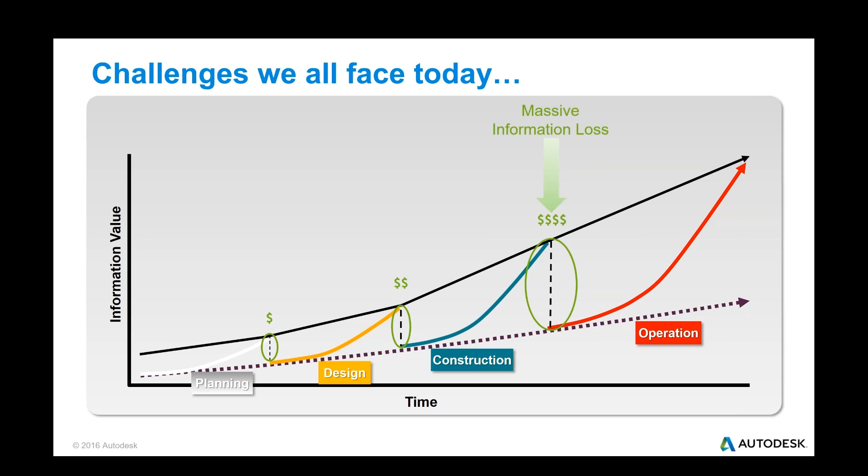So while there are benefits to each of these new softwares, there's also a lot of disruption that goes into it. And as you can see by this slide, the farther into that construction piece that we get, the more money it costs if we don't know what we're doing, where we're going, and how we're communicating.

Well, first off, we want to make you aware of the fact that Autodesk was the first technology provider in construction committed to the cloud. In 2012, Autodesk CEO Carl Bass announced their intent to fully invest in the cloud. That investment translated into a completely retooled development organization by adding hundreds of skilled development staff and focusing on building and architecture.

And we've seen this over here at CAD 1. We really got started in AutoCAD and then moved into Revit, but now we're seeing Autodesk invest heavily in their development in the construction space, providing good solutions that take design from architects and bring them to the cloud to communicate better through the construction cycle.

Let's see. Keep going.

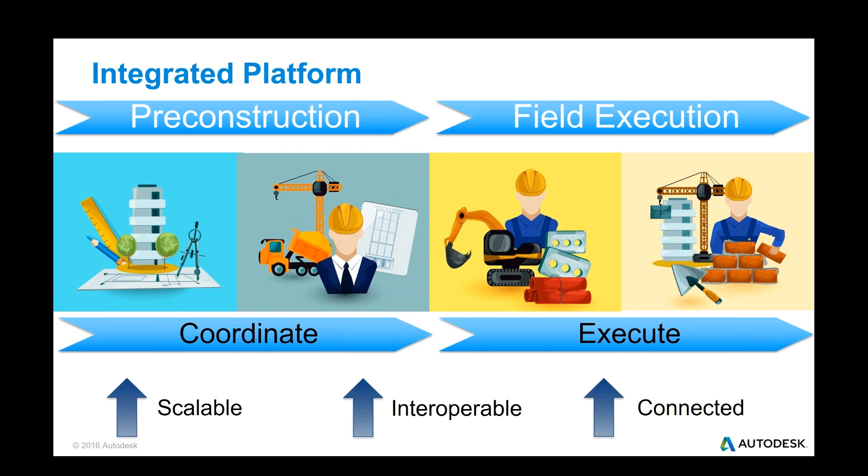So as we move through the planning and into the field, Autodesk solves your change management issues with a suite of offerings purpose-built for the execution phase of all the projects.

So all of this is grounded in Docs, which is the foundation for the entire platform. But it doesn't stop there. What's unique about the offering with Docs is that you can scale your investment as the need expands.

So we see a lot of customers in construction today struggling to use their view, markups, issues, point solutions to really manage the change on their job sites. But Docs is now a foundation for the change management that they need.

I sound so official. Yeah, you do. Yeah, I'll tell you. So let me tell you what the difference is in Docs in the industry today.

So we believe that you need version control with any view, markup and issue product that can be brought out to the field to automate the drawing and markup distribution. We also believe you need to manage the versioning and change process for all your 2D documentation, but also need a way to make it as easy as possible to use and adopt 3D models as appropriate.

All right, Autodesk BIM 360 Docs brings it all together, a working version control platform both in 2D and 3D, and the same easy to use experience. Guys, what I'm really going to talk about today is the ease of use of this system.

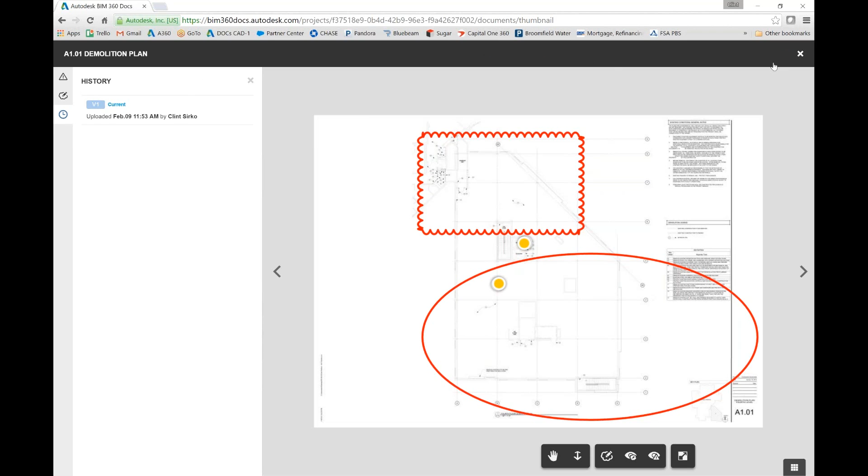And what we're going to show you is our actual Docs platform that we've been using in our office.

It's on that one, isn't it? Well, yeah, I think right now. Possibly. So if you guys can see our screen, you should see a couple of clouds there. Can you raise your hand if you can see the red clouds? There we go, now you should be able to see the red clouds. Thanks, Jeremy, thanks, Josh, perfect, perfect.

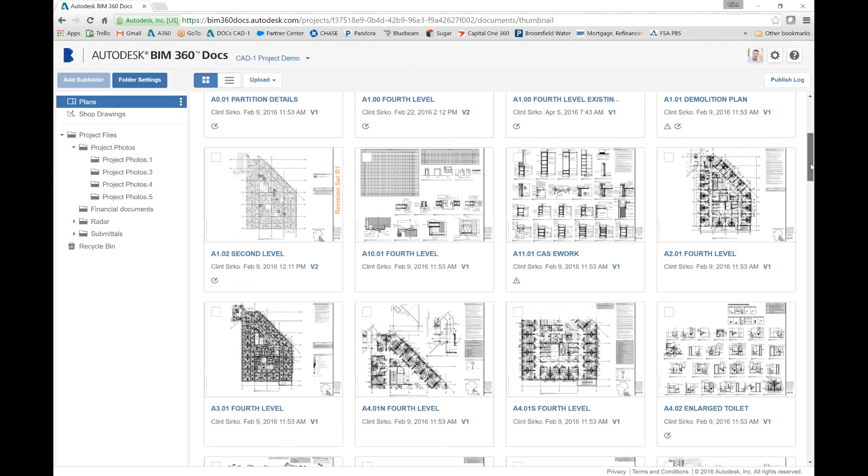So I'll let Clint take it over here, but you used to be in construction, correct? Yep. So how many headaches did you have trying to make sure everybody was on the same page? Well, I was really in an uncomfortable place where, as a company, we had a mandate and really a goal to go paperless, but we didn't have any really good solutions to do that.

We used some PDF viewing tools. We used a local hard drive - we had a local hard drive on the job site that we maintained all our electronic drawings on.

I also faced the challenge of a project team, in particular my superintendents and foremen, who were accustomed to using paper. They'd used paper their whole lives and wanted to mark up their sets in red pen, maintaining multiple sets through the job site for each superintendent and foreman. I worked on some fairly large jobs, so managing those was always a challenge.

So I can see one issue: we're going to burn a tree every time we print one of these plan sets. There's a green piece to it, but there's also another piece. How often were they correct? Were they on the same plan that you were on?

What was really challenging for me as a project manager, we were doing great 3D coordination using Navisworks and things like that, and we'd locate some ductwork. I remember a time I located some ductwork through our coordination process, and I walked out in the field weeks or months later with an idea about the issue we went through in coordinating the ductwork location. The guys were installing the duct where it was originally designed to go. I asked them, 'What are you putting it here for?' They said, 'It shows it on the drawing.' So I pulled out the drawing they had, and it was one of the original sets, probably 2-3 months old. As you guys know, things move pretty quick and changes happen really fast on a job site.

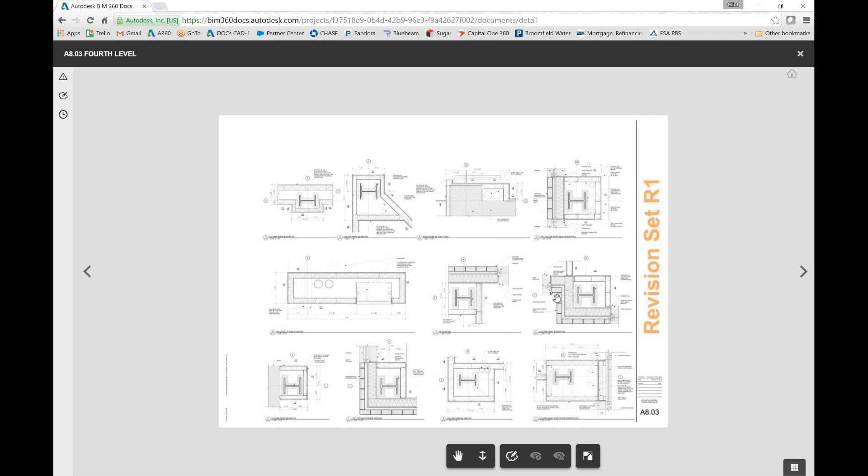So we're showing a screenshot right now of an actual project that we have, and this is a nonsensical project. These documents don't mean anything, but show us what you've got here. Give us a tour.

One of the powerful things here that really sets this apart from just a file storage program is the document viewing. You can see I've got thumbnails of the drawings. I can also just look at a list here of each individual document, so I can jump to those documents. I'm going to jump to this A803 fourth level.

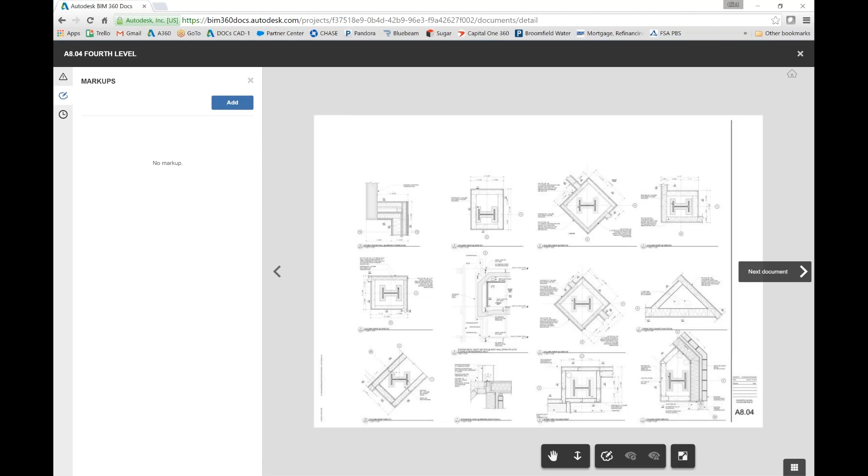So as you can see, I got an orange line in here, orange text that indicates it's a revision set. One of the powerful tools here is version control. As I bring in new PDF documents, we can bring in documents and supersede them. So you can see I've got version 1, and then version 2, which is the current set of documents. We've also got the ability to mark up those documents.

And these are shared with all stakeholders in the project, who get the program for free. They get an invite when we open up our documents folder. So if you're my flooring contractor or one of my MEP guys, it's totally free to you. You simply answer the invite and have access to what I give you access to.

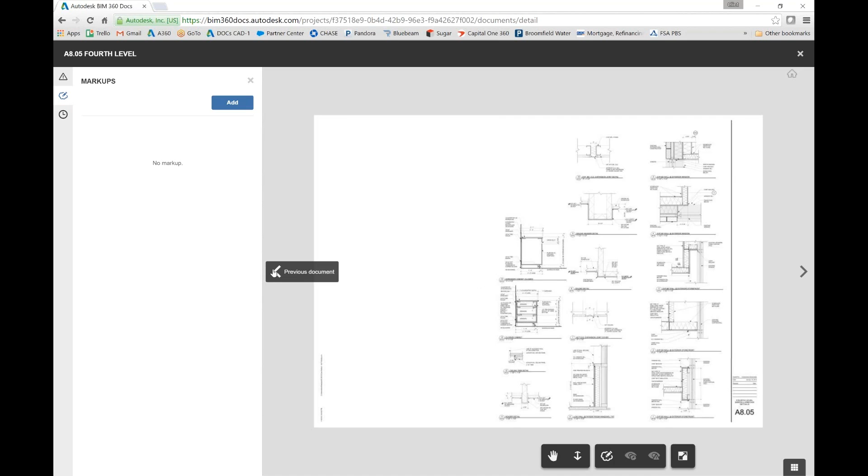We also have the ability to easily flip through our documents. One of the most powerful things is the user interface on the iPad. We've got free trials we'll give out to each person on the call here, just to give you an opportunity to use it and try it out. The iPad access is very fast, it's easy to access, and again, the ease of use.

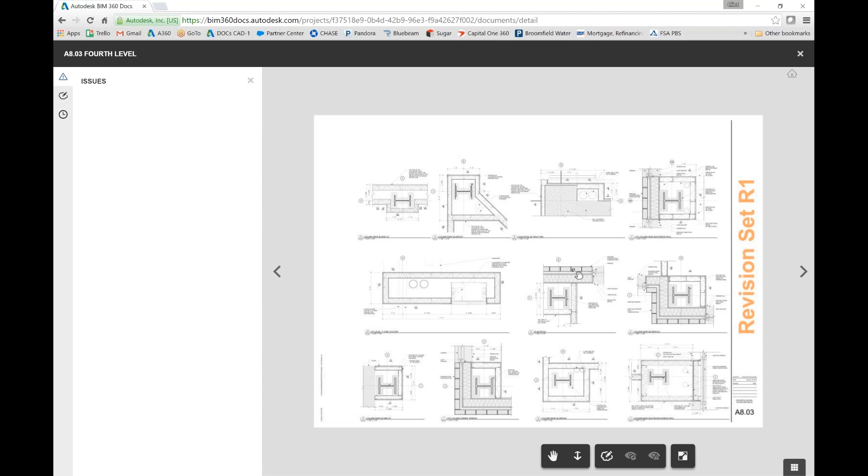I would feel comfortable giving an iPad to my foreman or my superintendent. They can easily navigate the documents. The files are a file size which is quick to load. I know using some other solutions, the files can become pretty large and overpower your device.

So we've got the markup features. We've also got the ability to add issues within our documents, so we can identify an issue in a particular location and track that issue to closure. We can assign that issue to an individual to make them responsible.

Also, from a project management perspective, we're going to see—I don't have anything loaded up in here, but we can maintain our shop drawings in a similar way. We can have that shop drawing information there, and share it with our project team.

So the next thing I'd really like to get into is this project folder structure. We can give individual folder access and security control to each folder. I can include a folder for submittals, a folder for RFIs or change orders, but also for each individual subcontractor, I can create a folder that is only accessible to them. So I can drop in their contract documents, change orders, and any correspondence or documents specific to that contractor.

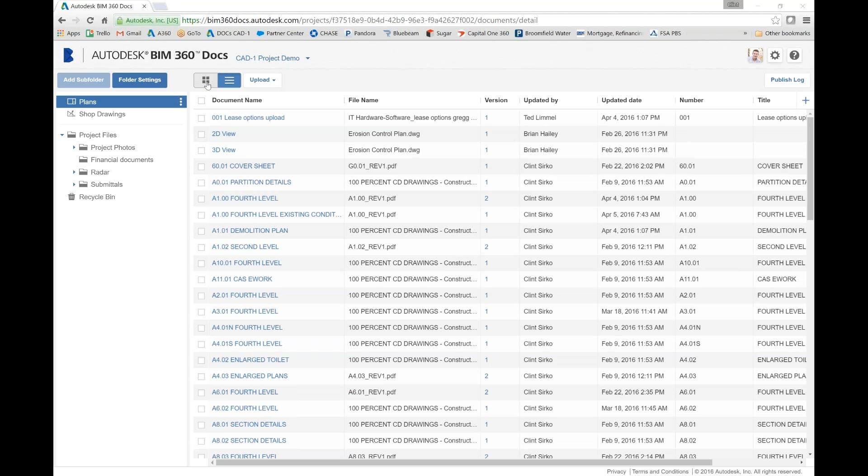This really provides an ease of use for your whole project team, being able to quickly navigate and flip through every document in your set. Bluebeam Studio opens an individual file and can overburden your device.

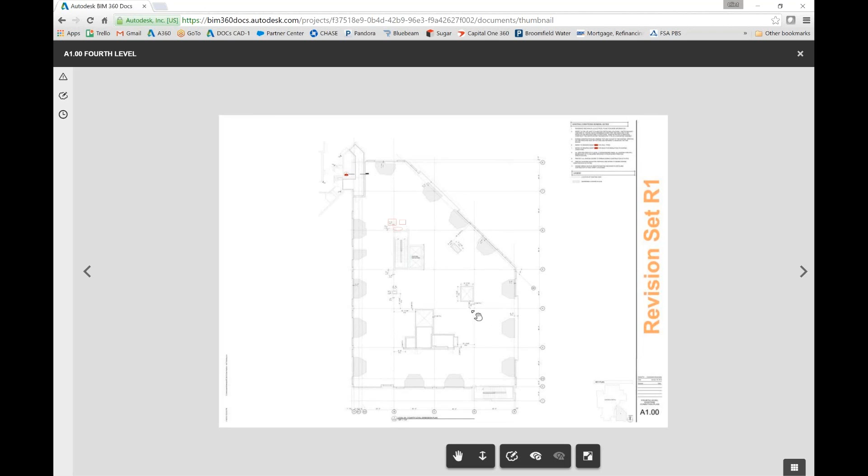The other thing it will provide is a simple login through BIM 360, so anybody accessing the drawings, as opposed to Bluebeam Studio, would need to download either a review or free viewer version of Bluebeam, or would need to have Bluebeam and an account set up through Bluebeam to access those studio products. So for your average foreman that's out in the field or subcontractor that's not using Bluebeam, it's providing a really quick, easy way to access all of those documents.

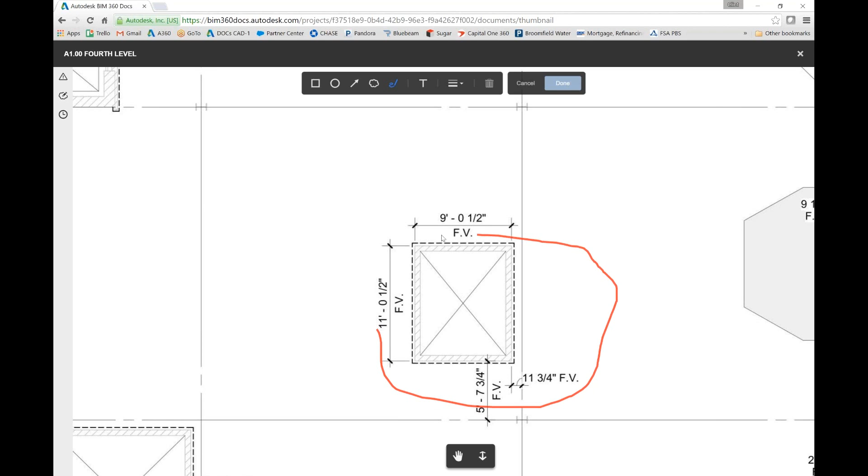I'm trying to do this with a huge delay. There's the markup.

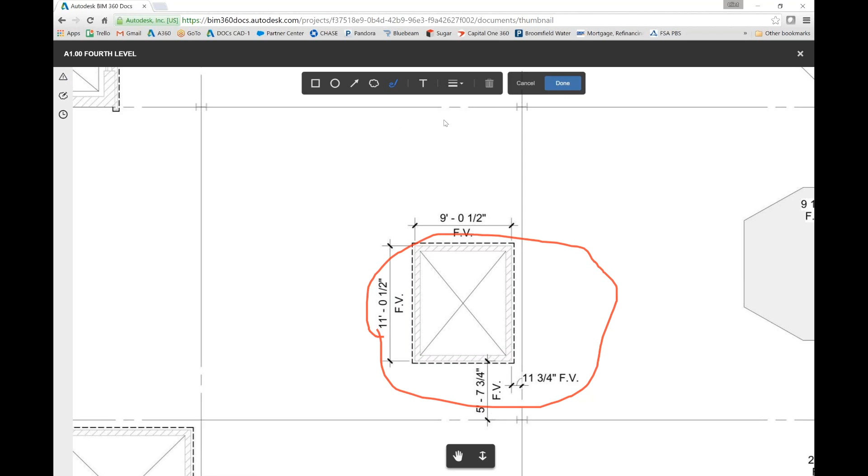Now, one thing - if I was in the field, we can't show you the iPad here, but if I was in the field and Clint was in his trailer, I could actually be on the 4th floor doing the markup, saying 'Hey, is this really 9 foot half inch?' and bring it to his attention. That would be simultaneous - he would see that in a matter of seconds through the iPad. So that's a cool thing.

Here's the page I was talking about. So we can list each markup, and then we can status them as open or closed, so that we know the status of that markup - has the change been made, is it up to date.

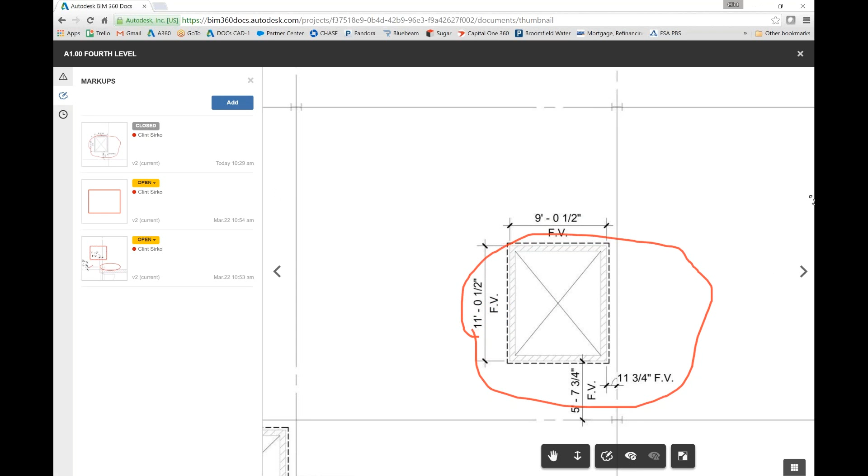So you can do this with your iPhone too, can't you? Yes, you can. And that would be a difference from Bluebeam as well.